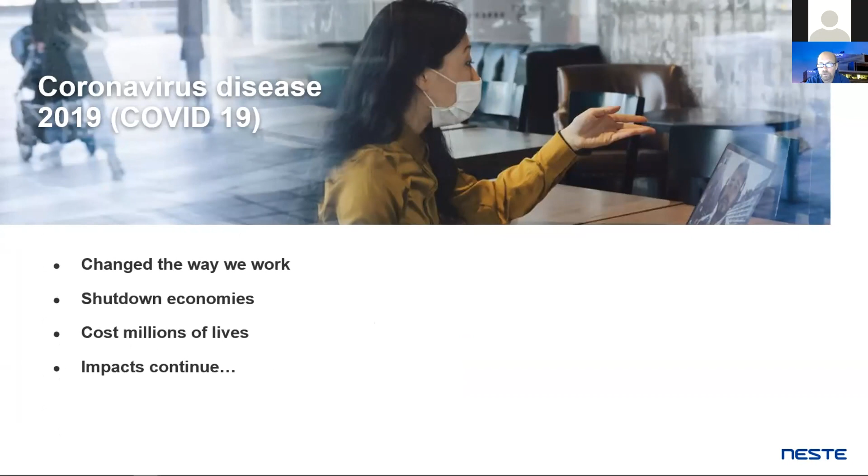Repeating, or illustrating it slightly differently from what Amanda said, it may seem odd to start talking about air travel when talking about engine oils, but there's a significant and long-lasting knock-on effect to the significant downturn in air travel. As the global economy locked down, air travel demand plunged. If you look carefully at the timeline on the left, it goes out to about 2050. Look more closely to about 2021, 2023 — the EIA projects it'll be several years before air travel demand regains its 2019 normal.

Alternatives to air travel suddenly became better alternatives — Zoom, Teams, WebEx. We have to do conferences like this over the internet. And if you look on the right-hand side, you can see what this means for active passenger aircraft in the chart. Actually, the more interesting one is the parked passenger aircraft.

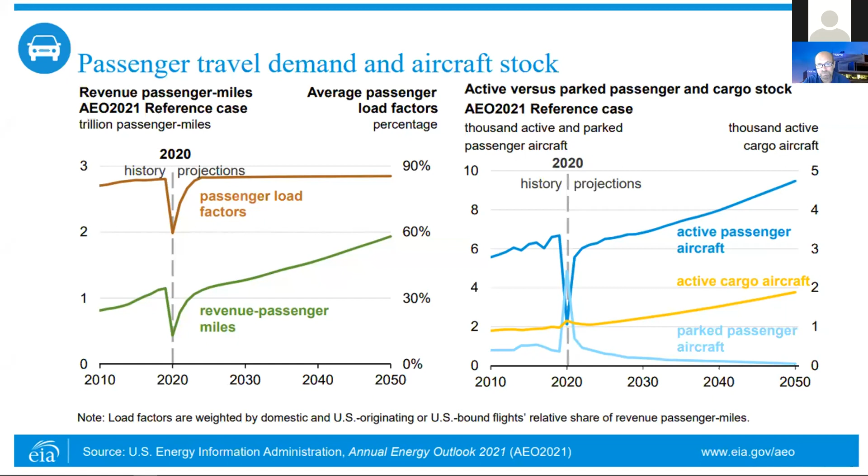I like this cover from Bloomberg for an article. It says, here's what you do when two-thirds of the world's jets can't fly. Lots of the air fleet got parked as commercial jet traffic demand plummeted, and lacking places to store planes, some major airports just shut down runways and parked them on the tarmac.

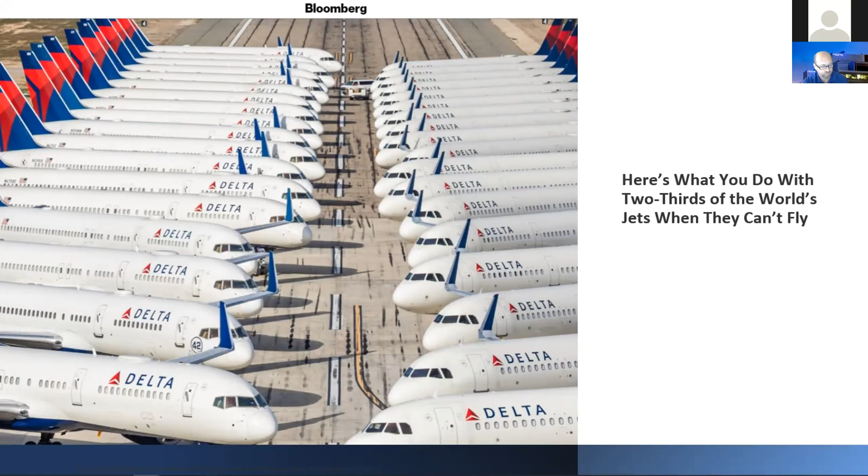And as Amanda said, the refineries had to respond to these massive demand changes. Fuel demand drops in the summer of 2020: jet fuel dropped 50%, gasoline dropped 25%, diesel was down 10%. The refineries had to respond. They tried to redirect some of the jet fuel into the diesel pool, but you can only do that so far before your volatility gets out of line. You try to reduce your operating rates — Amanda showed those operating rates, they're astonishingly low.

Some operating margins actually went negative for a period of time, where you were actually losing money by running the refinery. As a result, many refineries went into turnarounds — they pulled them forward, further crimping supply, because many refineries decided it was just better to shut down and do their turnaround now. And some refineries just closed.

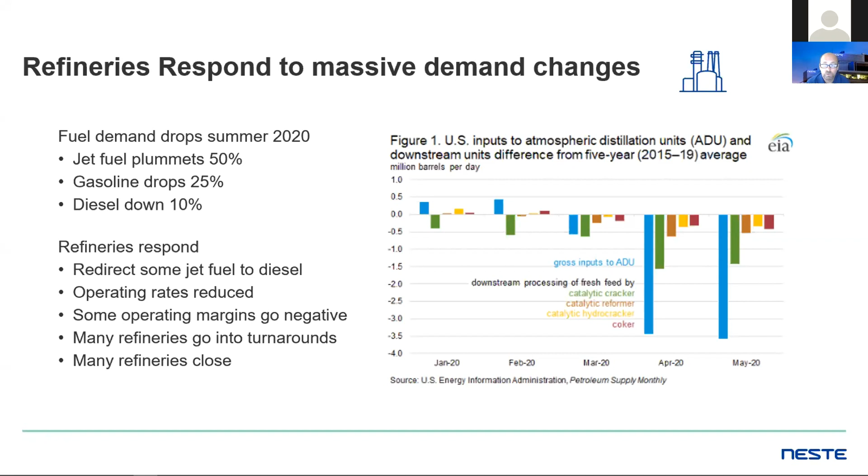And then, of course, what else could go wrong? We've had a global pandemic. Economic activity cratered, the refineries struggled, and unfortunately, as Amanda has hinted, Mother Nature was not very helpful either.

Looking at the Louisiana hurricane season recap for 2020, there were 30 named storms last year, the most ever in history. 5 of them hit Louisiana, the first time that's ever happened to any state. And by the way, when they hit Louisiana, they barely missed Texas. If they'd been a little further west, it would have hit Houston, and the damage to the industry would have been even greater. The strongest was Laura, it did $10 billion in damage.

Several refineries and petroleum processing facilities were forced to temporarily and repeatedly shut down, further reducing production of petrochemicals, fuels, and lubes.

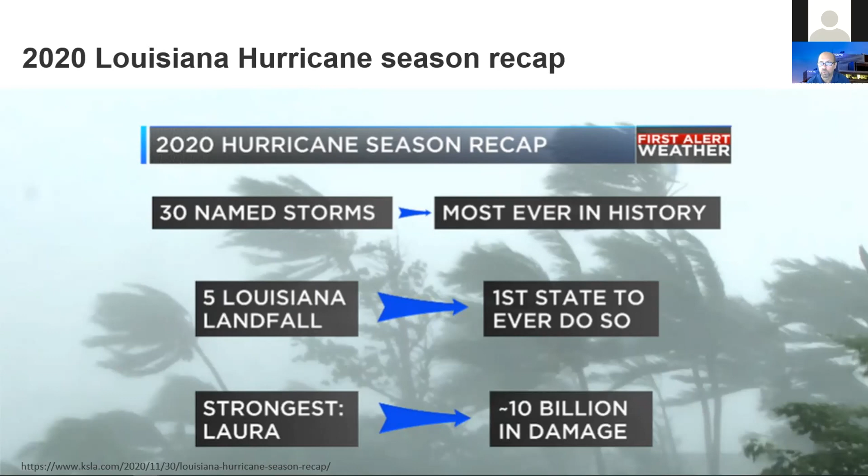Then there's this. In mid-February, all of the southern USA was in the grip of a completely unanticipated sub-zero polar vortex. Much of the US Gulf Coast was without power and below freezing for 3 days. The polar storm shut down 42% of US total production capacity, and these were, as she said, emergency shutdowns. They resulted in further difficulties restoring the plants, and it's taking 2 to 3 months to get back online.

Just to make sure it's not all the Gulf Coast - in March, of course, the Ever Given blocked 12% of the world's trade by getting stuck in the Suez Canal for almost a week. This spiked global oil prices with knock-on effects for weeks as the ports tried to clear backlogs. I'm going to finish my catastrophe report with this bright news.

The 2021 Atlantic hurricane season storm numbers increased in the latest outlook. What you're looking at here is Hurricane Laura approaching landfall last August. You can see Louisiana just to the north over there and the Texas coast just to the west. The petrochemical and refining industry is all along the coast of Texas and Louisiana. As you can see, one large storm making impact in that area can really hurt the industry.

I make this point for an important reason, which Amanda said. In a normal year, the refineries have already boosted production to fill their tanks in anticipation of a tough hurricane season. This year, the tanks are very low. We're seeing an abnormally high number of hurricanes, and an active hurricane season in the Gulf is likely to be more impactful than normal. Just to let you know, I have a personal stake in this.

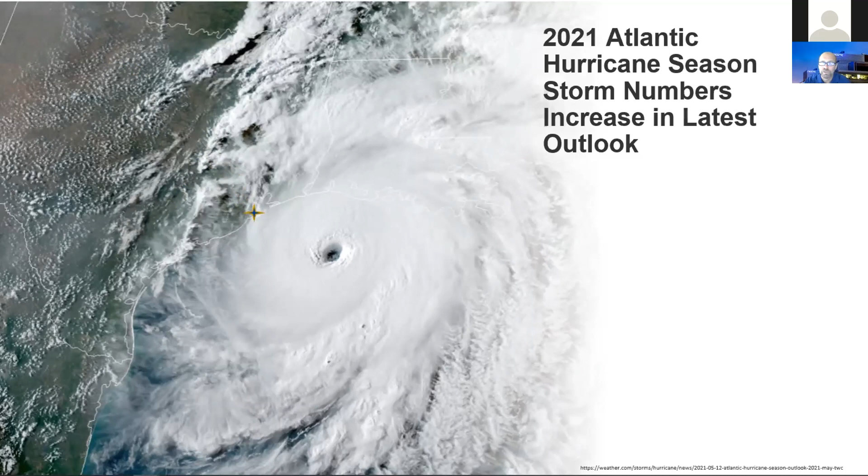These next couple slides, again, reflect kind of what Amanda has talked about. I showed you the refineries reduced production in response to the major demand reductions at the outset of COVID-19. So what happened to demand? This is globally now. This chart is from the International Energy Agency, and it shows the global demand cratering 16% in the second quarter of 2020.

And it predicts a moderate pickup in demand as the crisis begins to fade away. The chart shows global demand down about 3% in the upcoming quarter. So we were down 16, now we're going to be down about 3%, meaning demand is coming back up. But planes are still on the ground, and that makes it tough for the refineries to get their economics right.

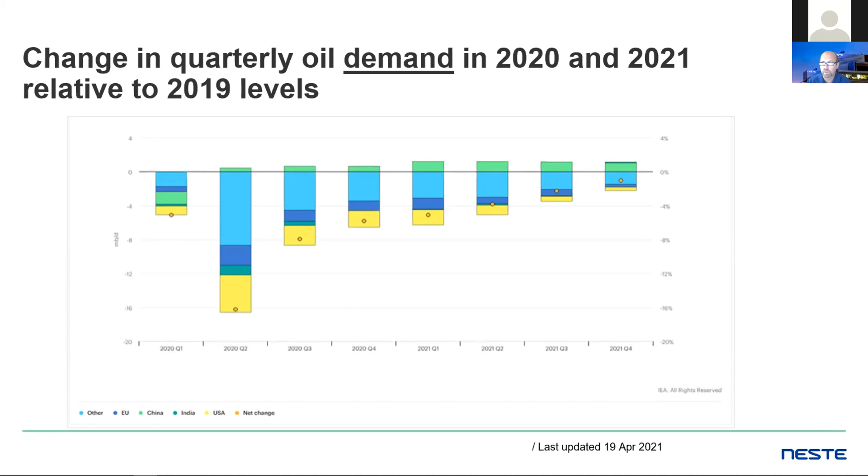This slide I'll kind of just blow through. Amanda went through this completely. Basically, it says prices are rising because of supply.

And finally, I promised a dog wagging its tail. Base oil margins are always insufficient to drive the refinery. So even though base oil values are going up and up and up, the refinery just can't adjust to that because the base oil production is typically less than 2% of refinery output.

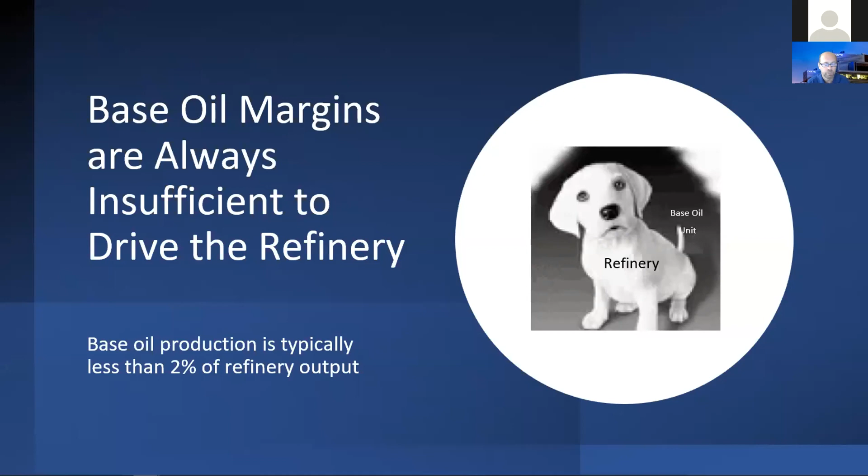Finishing up this section, base stock supplies are tight and volatile. The domestic leisure air travel is showing signs of recovery. International air travel and business travel remain depressed and are expected to remain depressed. The rollout of the COVID-19 vaccines varies greatly by country and region. In a normal year, base oil stocks are high going into the hurricane season. And it's going to be tough to predict base oil pricing and supply. You saw Amanda squirm. She had a tough one to try and explain that one.

So this is the midpoint of this presentation. I promised to stop overlapping Amanda's presentation.

Let's recount the situation regarding base stock availability. Let's take a look at the need for base oils in the future. There's people right now that are saying maybe we won't be needing base oils in the future.

I'd like to talk a little bit about the future of the internal combustion engine and the need for engine oils.

Politicians, in response to activists, keep making these lofty statements of their ambition to reduce future greenhouse gas emissions. There's little downside to proclamations that require no action until after they leave office. So they make these promises.

In February 2021, the UN Climate Change reported 75 countries comprising 30% of global greenhouse gas emissions have reported they will realize actual reductions of less than 1% improvement in 2030 production over 2010. The Intergovernmental Panel on Climate Change suggests a decrease of 45% is needed to limit temperature rise to 1.5 degrees C, and 75 countries are going to manage 1%.

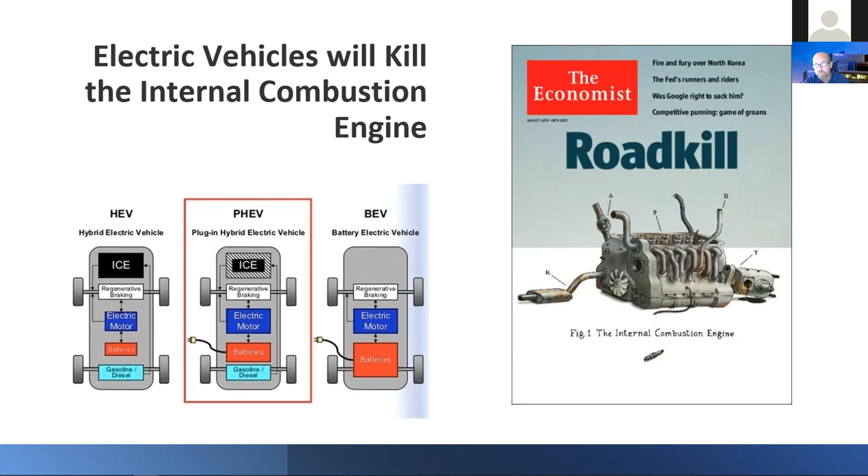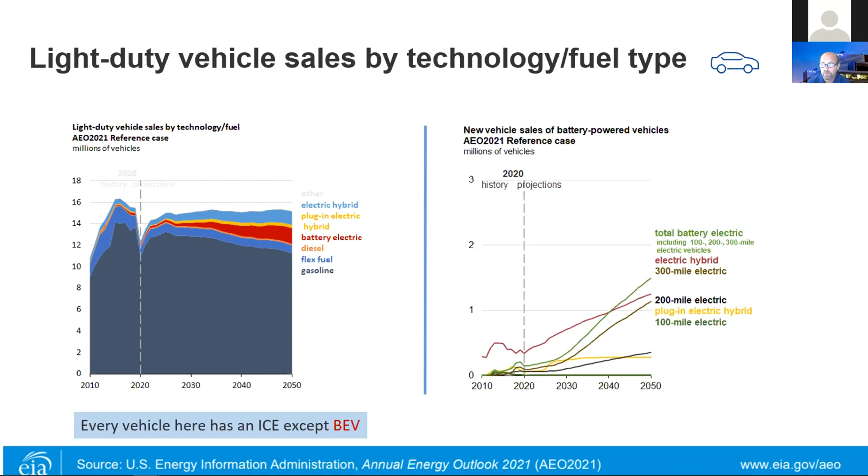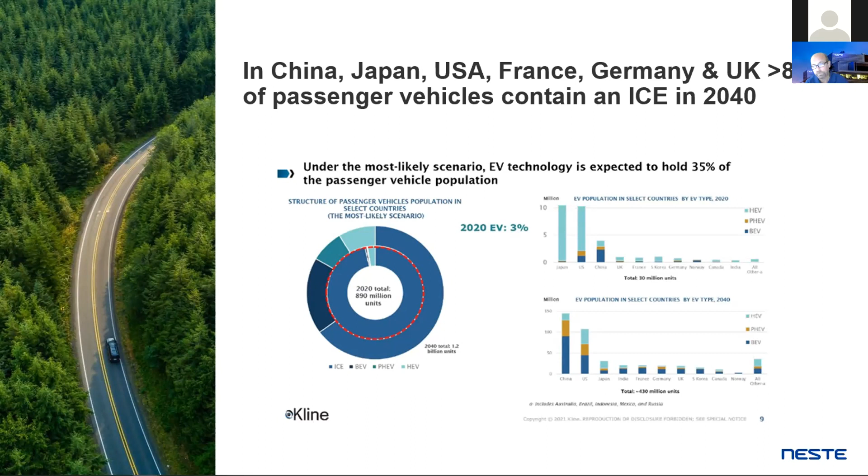These projections by respected sources are not being looked at properly. The internal combustion engine is far from dead, and we haven't even started talking about heavy-duty diesel transport. Even from an environmental standpoint, the internal combustion engine—particularly a hybrid EV with an ICE—makes a lot of environmental sense. The technology for BEVs is still in its infancy, and the manufacturing and environmental impact of battery production, not to mention coal electricity production, means the BEV isn't going to replace the ICE and hybrid soon. It will happen, just not soon.

If you'd like to learn more about hybrids versus BEVs, this TED Talk is very informative—Andy Rich of Infinium shared it. I'm not going to play it, but if you want to understand how BEVs' time has not come, but will, and how hybrids make a lot of sense environmentally, check it out. Some good information.

So where does this leave the auto manufacturers? They're in a terrible bind. Given the politics in their home markets, they have to invest in electric vehicles. Some are very cagey—Volvo says it will make no cars without electric motors—all EVs, not all BEVs. Some are heavily investing: GM and VW have committed billions to EVs.

Development dollars are flowing to EVs, including ICE-containing hybrids. They have a tough choice to make. How many EVs will they actually sell? How far should they move away from the internal combustion engine? They have major investments now, and I expect a reckoning.

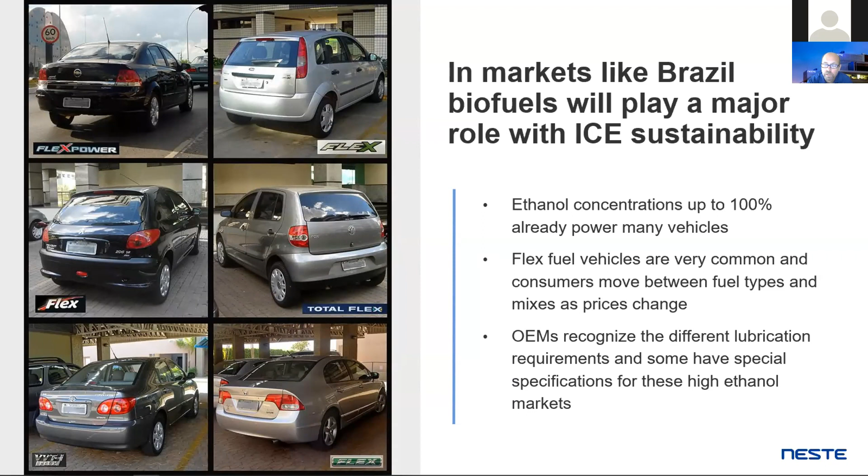In markets like Brazil, sustainability will be held on by biofuels, which will play a major role with internal combustion engine sustainability. In Brazil, ethanol concentrations of up to 100% already power many vehicles, in fact most. Flex fuel vehicles are very common. People move between fuels based on the price of the different fuels every day. OEMs recognize the different lubrication requirements, and some have special specifications for these high ethanol markets.

You look to heavy duty, the heavy duty market's going to stay with the internal combustion engine for decades. You're going to see a lot of shift on city buses, light duty delivery, local transport. They can adopt BEVs because routes are short and they can recharge overnight. A lot of municipalities and companies, especially on buses and delivery, want to show their environmental credentials. They will also adopt alternative fleets readily. But heavy-duty fleets seeking legitimate green credentials will adopt renewable fuels such as biodiesel and renewable diesel to reduce greenhouse gas emissions up to 80%.

Engine oils, in summary, are not a technical backwater doomed to fade away. Engine size, control schemes, and technology are going to have to change significantly. Internal combustion engines in 2050 are not going to be using GF-6. Technical demand for low viscosity, low volatility oils is going to continue to grow. Furthermore, sustainability is possible with internal combustion motor oils.

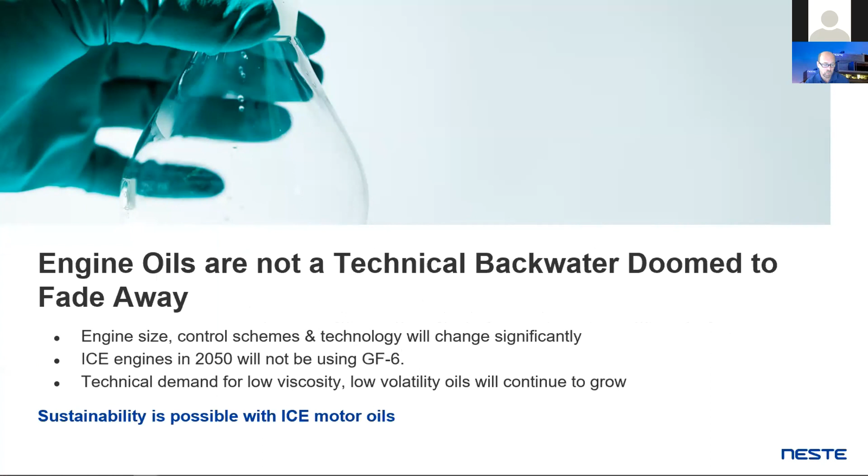Engine oils are huge players in vehicle efficiency. People don't like to recognize this, but the low viscosity engine oils measurably improve real-world engine friction loss. If you have less fuel needed to move the same amount of mass, you've saved energy. You produce less greenhouse gas emissions per distance traveled. Further, low volatility and highly paraffinic base oils enable longer drain intervals, so you produce less waste.

OEMs have already been pushing for this. They're under regulatory pressure and they recognize this and push for more of these tangible benefits. Still, the OEMs and the consumers would like to have a truly sustainably sourced base stock and lubricant.

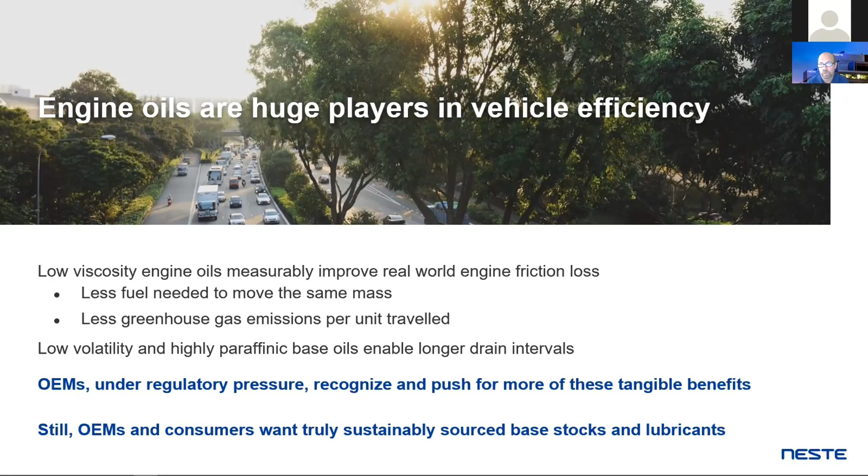So how do you do that? Well, there's three basic pathways to sustainable base stocks. The first is to use re-refined used motor oils. The second is carbon credit offsets. And the third is renewable base oils, which we'll talk about in a minute. They can be biogenically sourced, meaning they pull carbon out of the atmosphere, or they can be waste stream generated through waste plastic recycling.

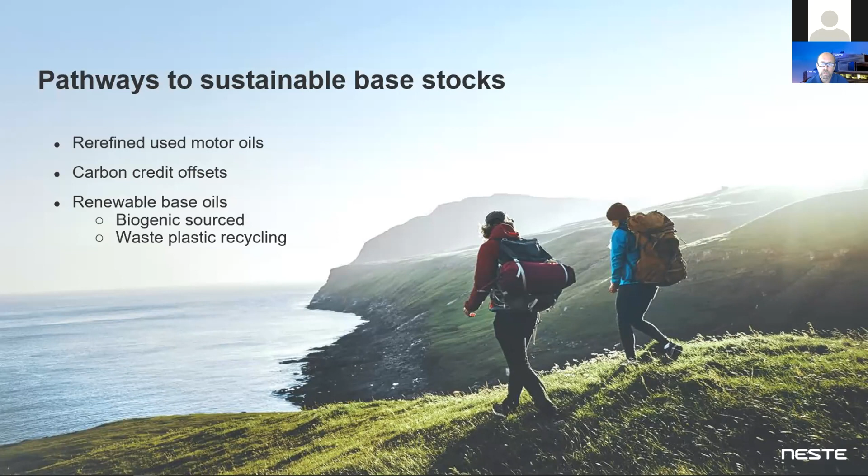So re-refined base stocks are gaining interest. Why? Re-refining takes a waste stream and reinserts it into the virgin base stock pool. The quality of the resulting base stock is really a function of the collection of what you got and contamination control. Today, what you've got is getting better and better. Used motor oil waste has a much better viscosity and VI profile than it has in the past. The reason for that is that we're using lower viscosity engine oils in the field and a lot more group 2 and group 3 content.

Further, you can take those re-refined base stocks, and you can hydrotreat them and distill them to improve the base stock quality. That makes it suitable for most 5W and even some 0W specifications. I think you're going to see a lot of motion here. Some major oil marketers are giving re-refined oils serious consideration.

I would comment as I leave this that Brazil, of course, has some of the best re-refining numbers in the world. So it wouldn't surprise me to see this also becoming a major issue in Brazil.

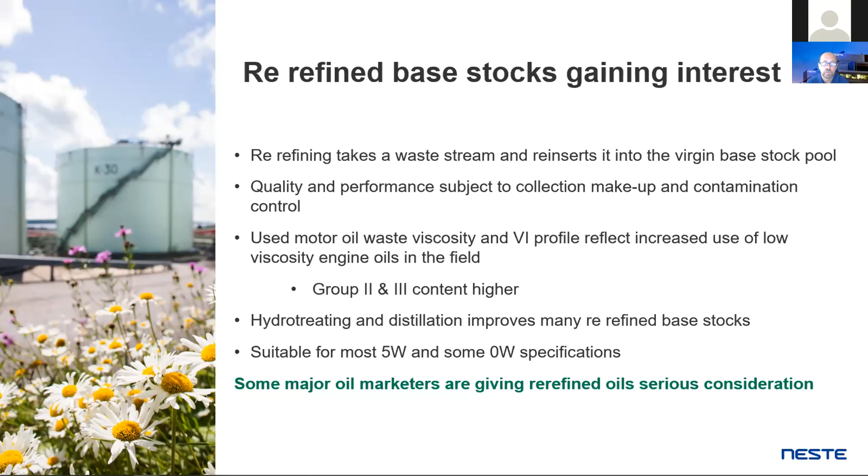Another approach is carbon credit offsets. Many major industries have tried to improve their environmental image by creating offset programs to compensate for CO2 equivalents created in their operations. Several airlines encourage customers to pay for CO2 offsets when they buy their flights. A couple of major oil marketers have declared their products carbon neutral due to offsets. The fact is offsets don't actually change the amount of greenhouse gas produced in making a product. Furthermore, questions arise about the durability of the offset versus the carbon reintroduced into the biosphere. Will the trees that you plant offset the carbon that you brought back for millions of years from underground?

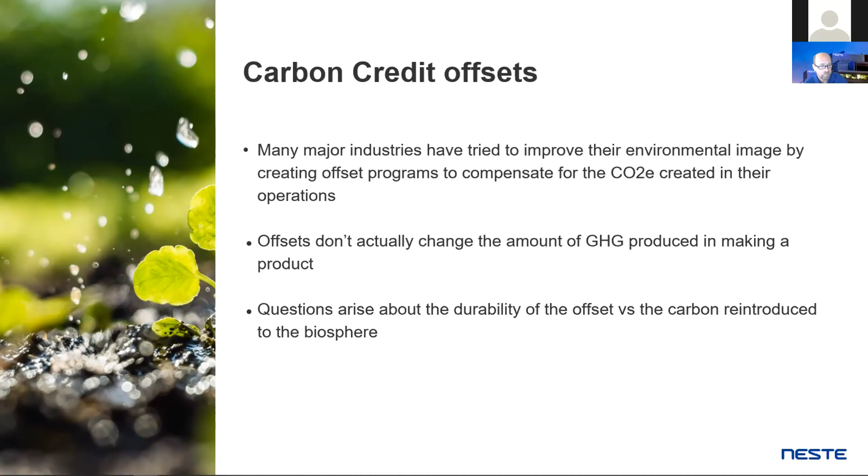There is another path, and that's renewable base oils. Plants and animals remove carbon dioxide from the biosphere and capture it in the form of triglycerides. These triglycerides have many uses as cooking oils, cosmetics, and other consumer products. Some of these triglycerides quickly become waste streams themselves from other processes. Waste or virgin plant and animal oils can be converted into hydrocarbons. An example is renewable diesel, such as NESTE, which is a 100% drop-in for fossil diesel with 80% less greenhouse gas footprint.

There are also technologies in commercial operation today to manufacture renewable base oils from these same feedstocks. An example of this is Novvi LLC, with manufacturing in Houston, Texas. They've commercialized a process to create an extremely low volatility, high VI base stock made entirely from renewable components.

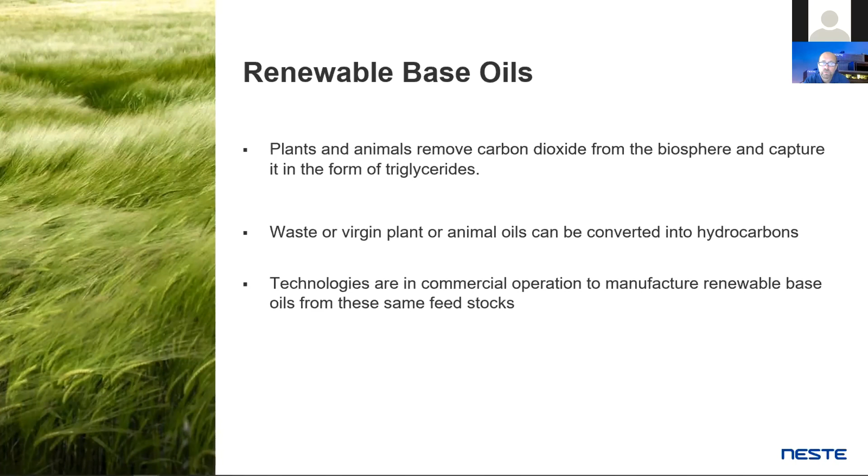To illustrate what can be done with this, I'm going to talk about something NESTE is working on. This is not meant to be a sales job, but rather a demonstration of the journey to zero — a low carbon footprint, renewable and sustainable base stock.

If you use a life cycle analysis where you look at all the processes that are operated and the carbon put into making something, you can come up with a carbon footprint for selected key base oils. For example, PAO has a very high footprint, around 1.9 kilograms CO2 equivalent per kilogram of base oil. Group 3 is very high as well, around 1.0, but roughly half of PAO.

If you combine a group 3 with those renewable molecules I just talked about, you can create a commercial high performance group 3 base stock that is carbon neutral — a group 3 plus carbon neutral base stock. You make sure you source those in accordance with practices to ensure sustainable sourcing. This new base stock enables blenders to make low carbon and reduced carbon claims without relying on carbon credits.

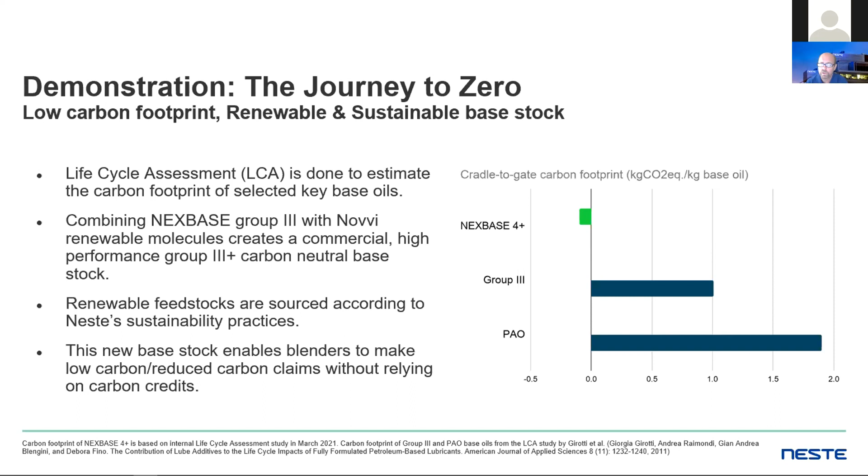I'm not going to spend much time on this slide because what I want to emphasize is what is possible and demonstrated here. It is possible to manufacture a carbon neutral group 3 plus base stock with excellent performance. The NOACK evaporation is category leading because the renewable molecule distribution is so tight. The CCS is comparable or better than most other high VI solutions, and it's carbon neutral without offsets.

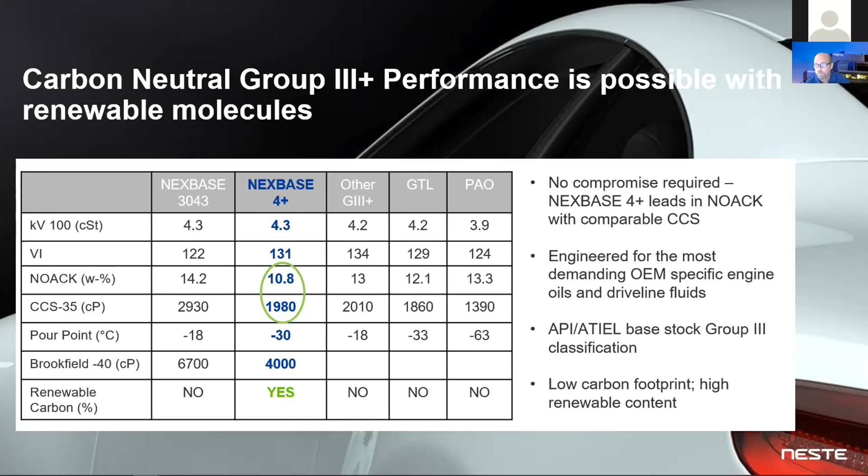So as you look at that table, comparing other Group 3 pluses, GTL and PAO, you see a tremendously low NOACK and competitive CCS with renewable content. That's pretty important.

In summary, global base stock supplies are very limited due to coronavirus impacts on fuel demand patterns, which are not going to ease until at least 2022. Environmental factors have further impacted global base stock supply due to ongoing large-scale natural and man-made events. The internal combustion engine, I will contend, is going to remain the dominant motive force through 2050, despite virtue signaling politicians. New motor oils are needed.

This is an important message that I hope you did capture from this discussion, because as we hear more and more about EVs, keep in mind that you need to talk about battery electric vehicles and vehicles that do not include an internal combustion engine to really understand the penetration rates.

Renewable feedstocks — there is a quest for truly renewable base stocks. It's going to focus on renewable feedstocks and re-refining. High-performing Group 3 plus carbon neutral base stocks can be made to bring real benefits to OEMs, consumers, and blenders.